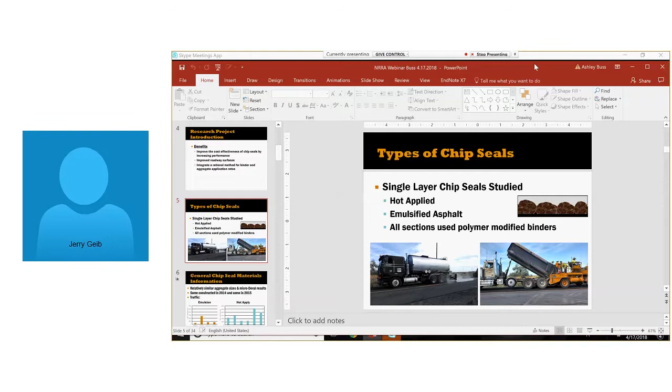Did you click on the present desktop, or did you present the PowerPoint in the Skype meeting? Because PowerPoint in Skype is really slow. I did the desktop. So you may need to minimize your screen to see your slides. Oh, are you seeing the desktop? Okay, now I see. It still might be a little slow because you've pulled the PowerPoint into the Skype meeting, which tends to be very slow. But try going to the slide. Oh, that worked. This works? Okay, perfect. So yeah, let me know, chime in if there's any other technical issues.

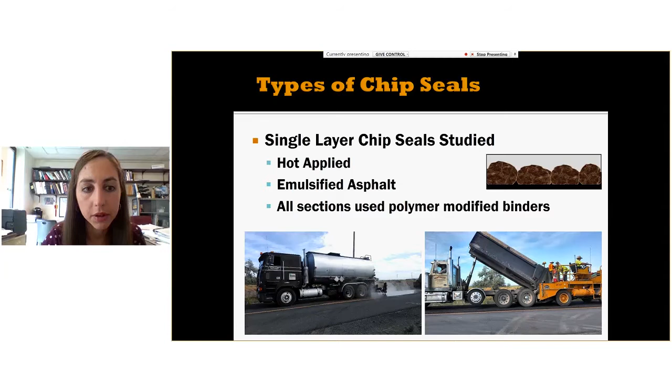Hopefully it'll advance now. But with the types of seals, we have the hot applied and the emulsified asphalts, single layer seals. Can you see my mouse? Yes, we can. Okay. So we have the single layer chip seals, and then all sections use the polymer modified asphalt binders. And so these are just a couple of the pictures from the chip seal construction process.

So for the general chip seal material information, my background's really in materials, and so we wanted to collect a whole bunch of information about the materials that we were using. But when we got all the materials here and started analyzing them, it's kind of interesting. We had relatively similar aggregate sizes, with the exception of Unit A down here. So I'll talk a little bit more about each of the sections, but relatively similar aggregate sizes. We had really similar micro-Deval results, so our anticipated aggregate polishing was about the same.

We had some seals constructed in 2014 and some in 2015, and I'll talk a lot more about the 2014 sections. And this is kind of the traffic profile in the graphs down here. We have the average daily traffic on the y-axis, and each of the units, and the units down here in the yellow, these were the emulsion, and those tended to be placed on lower volume roads. And we have the hot applied over here, and we had a pretty good range of different traffic volumes that those were placed on.

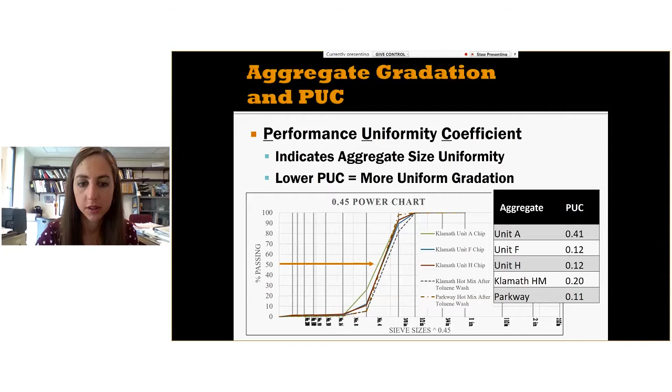So how are those? Sorry, I think we're one slide behind. Did that help? Didn't move. What should the title be? Chip seal performance. Yeah, we don't see that. Can we try? What'd you do last time? Minimize? Or did you kick up your PowerPoint? Share screen. And here's the presentation. No? We're still seeing this same slide. Can you minimize the Skype window and see if we can see the PowerPoint behind it? Okay, that's minimized. Did that do anything? Nope, we're still looking at the same screen. I'm not sure what's going on. I just have it in presentation mode and I'm advancing the slide. Maybe it's moving slow because the video is going. It shouldn't. Don't use the presentation mode, just use the PowerPoint.

So you're in share screen right now, and you've minimized the Skype part. Yes. Okay, we're not seeing that for some reason. This is a new one for us. Try not to use the PowerPoint presentation mode, just open up the PowerPoint. That's what she says she's got on her screen, but we're not seeing that. I guess try turning off your video. Okay, I'll switch to audio only. Yeah, that didn't work. Are you getting video or not anymore? No, we're not seeing video, but we're still looking at that same slide. Yeah, I've minimized it. Do you see that button at the top that says Stop Presenting? Yes. Maybe you should click on that. There we go. Okay, now we're back in the Skype window.

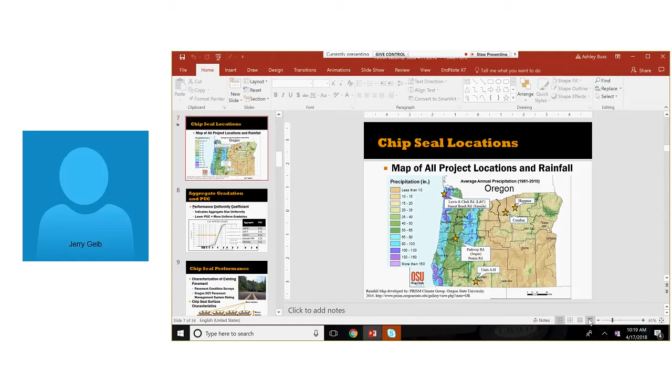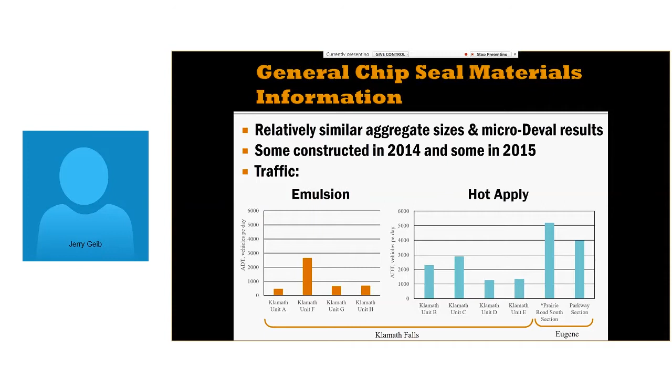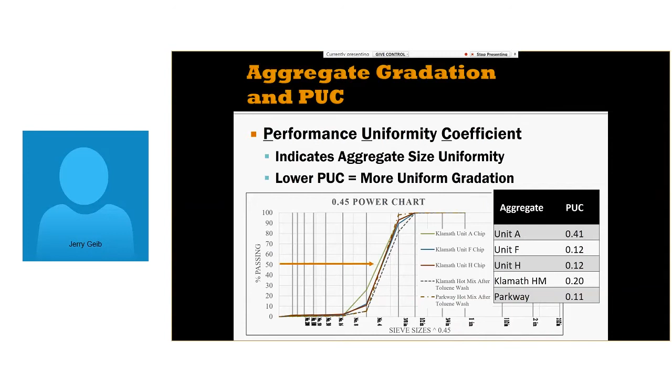Okay. And then try it again. I'll try share screen. Yeah, try share screen, minimize, and then open up your PowerPoint. Are you seeing it? It's coming. There we go. That looks better. Okay, that works. You can probably turn your video on again. Right now we're looking at general chip seal materials information. Did you see this slide yet? Yes. Okay, then I'll advance. So now we have all the chip seal locations, and this is new, right? Yep, saw that before. Okay. One more. All right. Now you can turn your video back on. Okay, I'll try. Well, I've got to exit out of the... Never mind then. Yep, we'll just keep going.

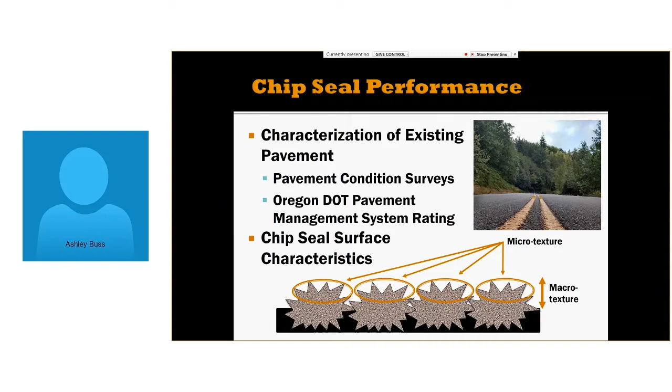Okay, so with the chip seal performance, we were characterizing the existing pavement condition. And so I wanted to talk about the microtexture and the macrotexture. So microtexture is really going to be a function of your aggregate characteristic, that surface texture of the aggregate itself, whereas macrotexture is going to be more of a characteristic of the number of aggregates that you have and the uniformity of their size and how embedded they are into the asphalt. So that's really an important characteristic of a chip seal because you can tell a lot of things by it. So macrotexture is really the key thing that we were able to take a look at here.

So it's determined by the size, shape, and the relative spacing of the aggregate particles. And to measure the macrotexture, we use the mean texture depth, and New Zealand has a very nice specification that's quick and easy to do. It's very inexpensive, and it's called the sand circle test. It's very similar to the ASTM sand patch test, except in the ASTM you're using glass beads, whereas in the New Zealand method you're using a very tight gradation of sand, and that ends up being a lot cheaper, and you can just leave the material on the roadway. You don't have to try and sweep it back up.

So in general, the higher micro and macro texture, there's kind of an interplay there, the better the skid resistance. And there are some really great reports that have been done about measuring the trends between micro and macro texture and having that relate to skid resistance.

We didn't get into that too much in this study because on the dynamic friction tests or the microtexture measurements, they were really seasonally affected. And so we think that there needs to be a better way to standardize those results, and they're pretty sensitive to seasonal variations. So we didn't get a lot of really great consistent data with the microtexture results, whereas with the macrotexture, we got pretty consistent data over time that was consistent across the sections, and then it matched up pretty well with other national level research that's been done.

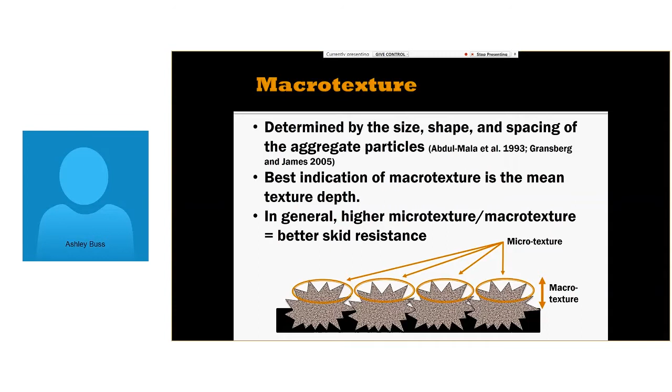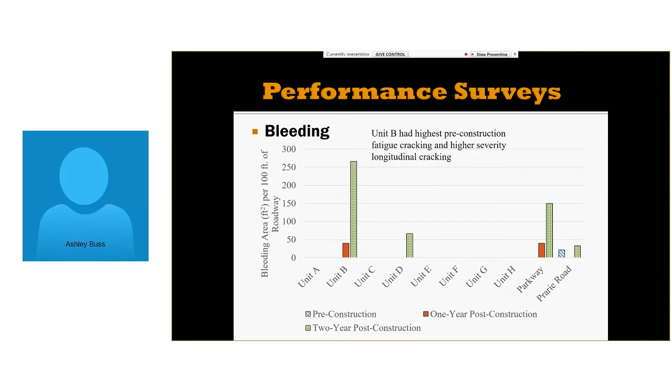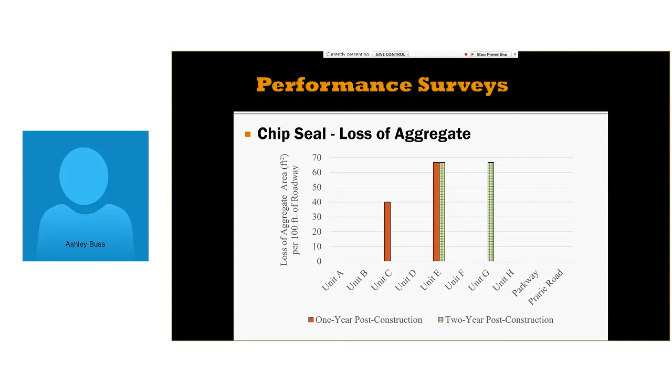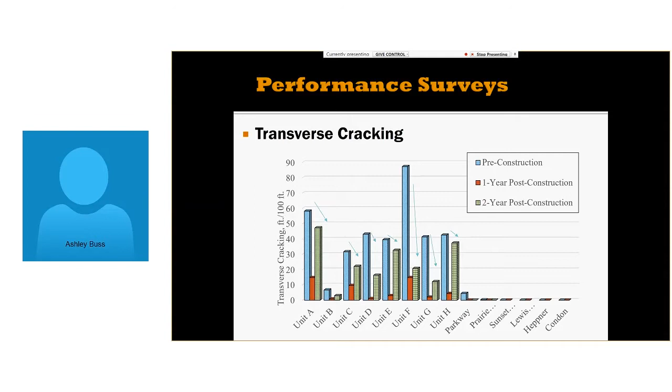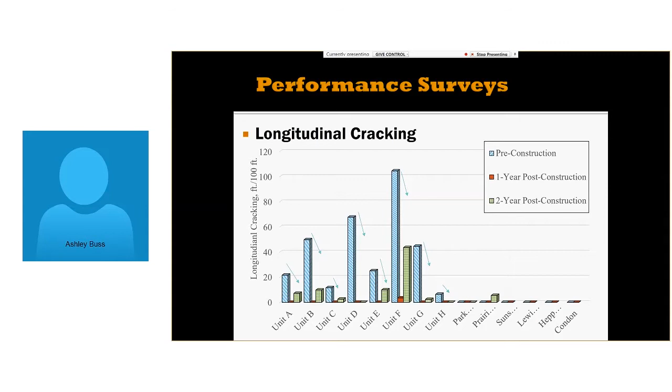And then I also wanted to talk about over here on the right side of the graph, where we had no cracking in a road, we didn't ever see additional cracking. So I thought that was kind of an interesting contribution of the study, looking at these sections sort of crack by crack, looking at the severities, and then seeing what's returning out there. And this is really about the type of binder that you're using. So is the binder going to be able to bridge those cracks? Are the aggregates going to stick there and have those cracks sealed up for some years after the seal is actually placed?

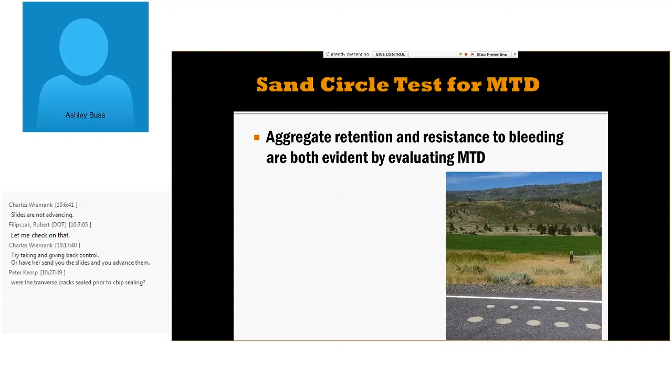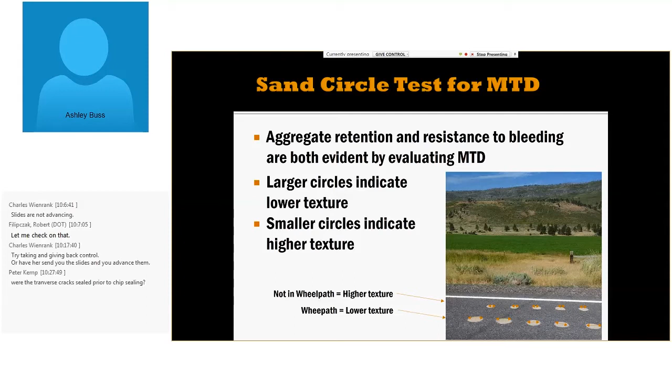So we ran the sand circle test to look at the macrotexture trends. The aggregate retention and resistance to bleeding are both evaluated by the macrotexture. The larger circles indicate lower texture. So the larger circles here, those are in the wheel path. And the smaller circles here, they're off to the edge. So that would be not in the wheel path, and you get smaller circles, so you have higher texture.

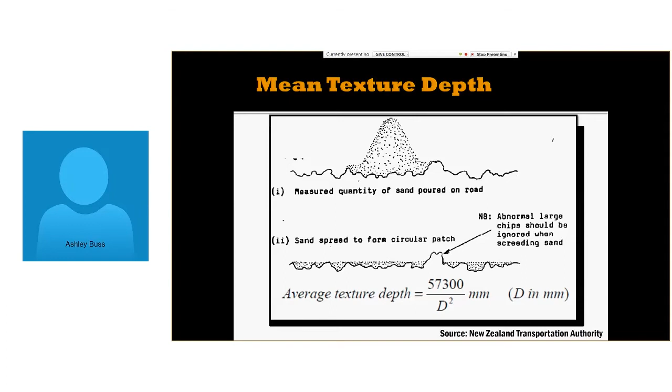And this is kind of just a diagram from the New Zealand specification of how mean texture depth is measured, and the equations that you can use to determine the average texture depth. So taking a look at what happened over time, start here with the pre-construction condition, pretty low texture. Right after the chip seal was placed, you have a high amount of texture, and then a reduction over time.

And we wanted to take a look at the performance specification that New Zealand's actually using. And so what they do is at 1 year, so we're focused in right here at that 1 year mark, they go in and they have an equation that uses the chip seal design life, so how long they expect this chip seal to last based on the amount of texture there, and they can also use that in programming new chip seals into their budget.

And so they come out at 1 year and compare the measured value versus the requirement. And you're able to tell here that we well exceeded the requirement. And this was Unit A, this was an emulsion, used a CRS-2P, and we had a 0.48 gallons per square yard.

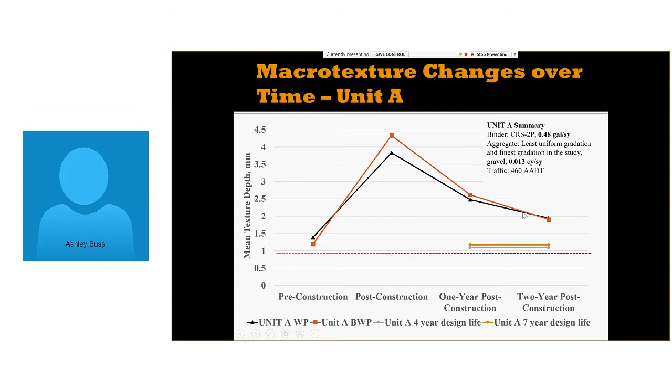And then this is Unit B and C. These had some rougher pre-construction pavement conditions, so some pavement deficiencies there to begin with. The mean texture depth was wider range to begin with, and after the chip seal, it looked pretty good. After 1 year, it looked pretty good, and then after 2 years, it got a bit lower, but it still would have passed that 1 year performance specification.

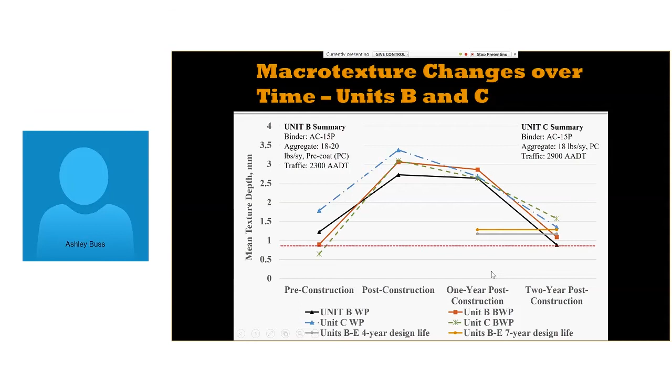And this is just another way to look at the data. So you have the mean texture depth, and these are box plots of the statistical data that was taken in the pre-construction texture condition. After construction, we have between the wheel path and in the wheel path, so you have a little bit of variability there. After 1 year construction, things kind of even out, and you have this deterioration curve that you can see happening in the sections.

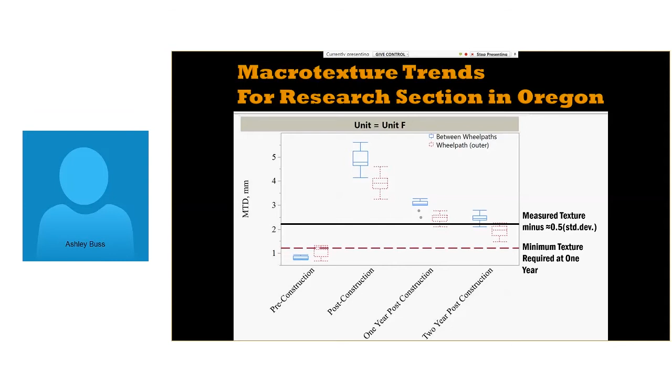Now we took that and compared it to the measured texture minus a statistical variance. So we want to make sure that we're statistically above the measured texture, and then compared that to the minimum texture requirement that New Zealand uses. So this is where we're getting into the idea of, wow, we think a performance specification might work pretty well for Oregon. And Doug had done a lot of work in this area.

This was published in 2010 in an Oklahoma study that Doug had been working on, where they studied the mean texture depth over some period of time, and they were taking the measurements in very tight increments. We were just doing yearly measurements, whereas Doug was out there monthly taking texture measurements for the Oklahoma study quite a number of years ago.

And so I was curious how our Oregon results would compare with the model that Doug developed in his Oklahoma research. And interestingly, here's that at construction, 12 months after construction, these dots are just averages of the mean texture depth of what we were getting. And our aggregates lined up, it was all pretty similar. And we follow this curve pretty closely. So what this means is that this deterioration model, you can use it in other places.

And what's really important are these trigger values here of, you don't want the chip seal to fall below a certain texture depth. So as that texture is deteriorating, you can use trigger values to determine, okay, once I put a chip seal in the program, how long does it take for me to actually, from where I program a chip seal, get it constructed? And you can use this deterioration model to back out and program your chip seal budget accordingly.

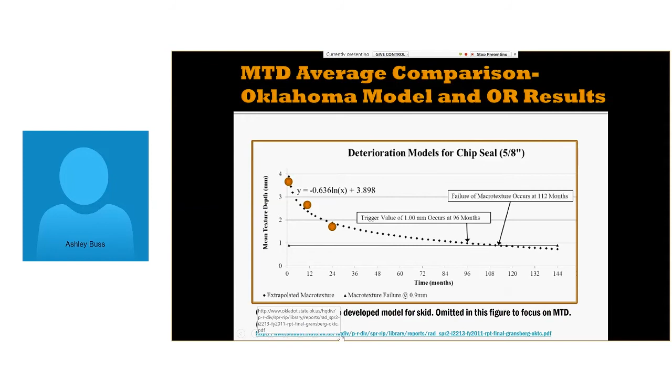So I don't want to spend too much time on preservation programs, but I think as we took these results of what we were finding in the chip seals, as we move forward to change specifications, we take a look at what Oregon has compared to the best practice recommendations that Federal Highway provides.

So the first one is adequate dedicated funds, and with that, Oregon kind of has an interesting cycle where they have an on year and an off year. So hopefully in the future they'll be able to even out the work a little bit more and have more sustained funding in the chip seal arena, and not have 1 year where you do a whole bunch and then the next year where there's hardly any.

And then also effective marketing of preventative maintenance, and I think that's just starting to communicate the results, the good performance that we're seeing in the phase 1 research, support from management, legislative support, training and buy-in of workers. So I mentioned there had been some folks retiring and some new inspectors in ODOT who hadn't had as much experience with chip seal. So bringing in some of that, the design and how that happens is important.

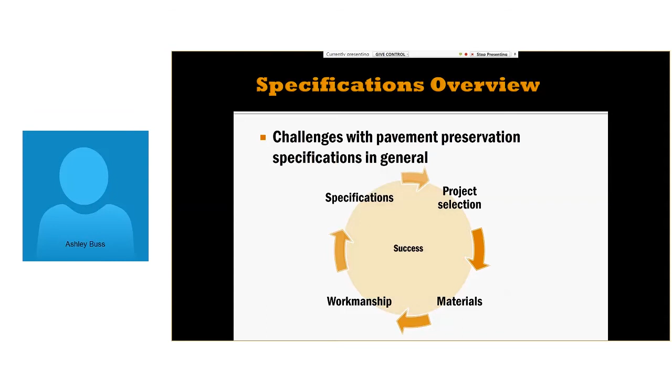And then with a performance spec, the big thing that Oregon wanted to do was get out of the business of setting the application rates. And so we're kind of taking a method spec, reworking it to have it be a performance specification. So that means we need to have different risk profiles, and that should ultimately change based on the pavement condition. So the worse the pavement condition, the agency needs to be taking on more risk, and the better the pavement condition, then the risk can be shifted more to the contractor. And then there's always that in between too, where you've got some shared risk profiles also.

Some of the specifications that played a huge role in the research is the New Zealand P17 chip seal performance specification. If you haven't looked through it, it's really an interesting program and an interesting way to do a performance specification. There's design guidance. They have a really great manual all about chip sealing and the history of chip sealing in New Zealand.

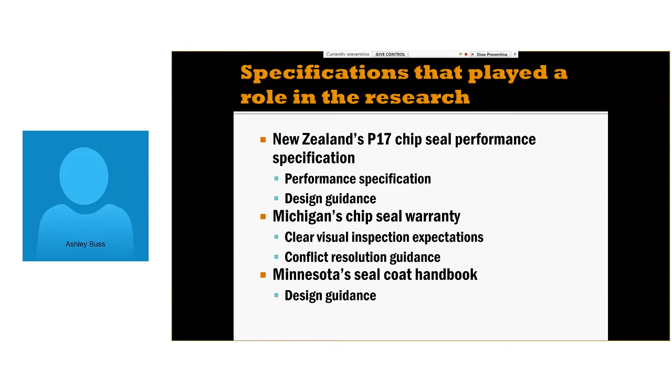So some of the major specification changes that we're moving forward with is removing the application rates. And this is really a culture change between taking a method spec and then using a performance specification with the macrotexture requirement. So in the new specification, the contractor would provide the material test, and then they would design the rates of the chips and the binder.

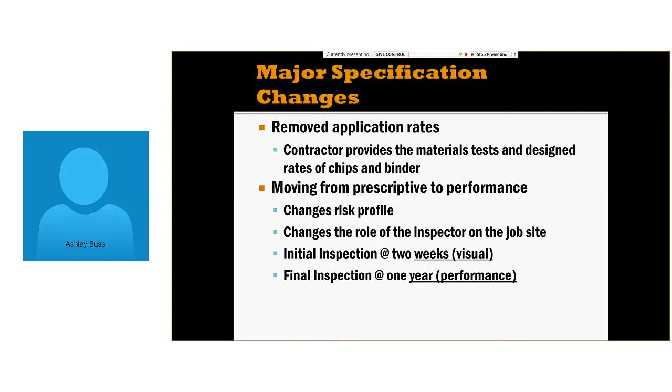And moving this from a prescriptive to a performance specification, that's going to change the risk profile. It'll change the role of the Oregon DOT inspector on the job site, and we'll have an initial inspection at 2 weeks where there's a visual inspection, and then a final inspection at 1 year. So in the performance evaluation, there's a visual inspection that takes place at 2 weeks and 1 year. Then at 1 year, the macrotexture trend over time is looked at, and then also the variability in the macrotexture tests will also matter.

So major specification changes would be a 1 year maintenance period for the contractor, and it would be anticipated that that's going to be built into the price of the bid. The pay schedule is going to change, and that's one thing I think will really influence how easily the specification will be implemented, the details on the pay schedule.

Retainage really isn't an option because the contractors have to pay their material suppliers, and there's a little bit of profit margin, but there's not a huge profit margin that retainage can be absorbed. So the bonds seem to be the best way forward, and it seems that's how most states with warranty bonds are able to do the bonds on the chip seal.

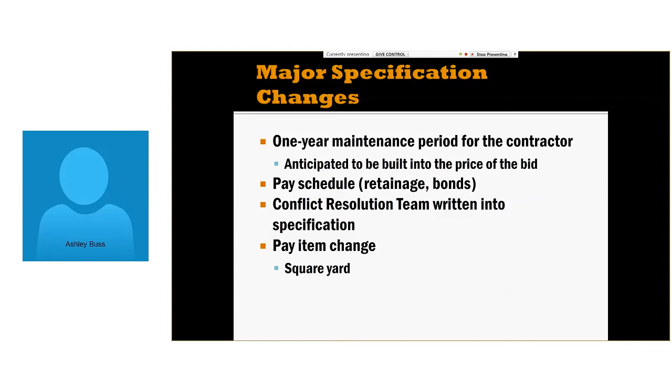So I mentioned the role of the inspector is going to change. With the old specification, the inspector was actually setting the application rates. So they had an active, more directive role in the construction process. In the new specification, it would be more of an active observer. They take the observations, times, temperatures, actual rates that are applied, and use these notes at the 2-week initial inspection, and then again at the final inspection.

Another thing is the inspector, we want them to share any concern with the contractors at that time while the contractor is there. And if there's any problems with the chip seal, we want repairs to be made as soon as possible, because it's easiest to make the chip seal repairs while the contractor's there.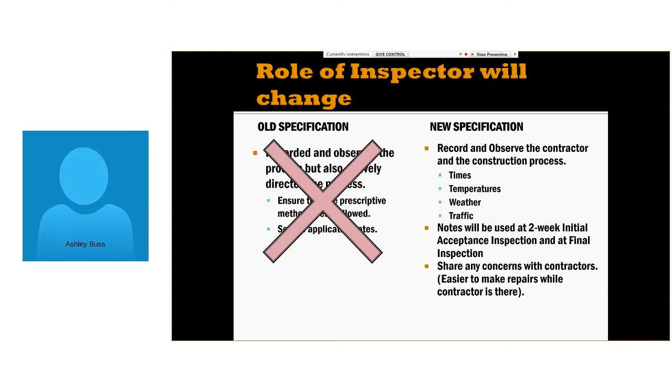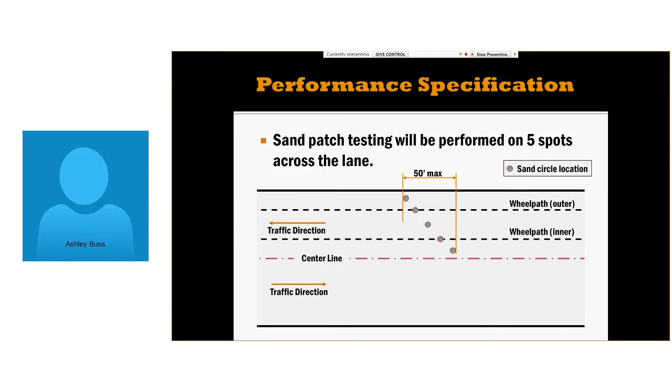And all of the sections that we looked at, they passed. So it'd have to be a pretty catastrophic failure of a chip seal to not pass the specification. But we think it's a good way to see, once we're out there 12 months after construction, that we have a good seal and that it's going to last for some time. The sand patch test would be performed on 5 different spots across the lane, and then the average would be taken as well as the standard deviation, and that macrotexture would be compared to these numbers here.

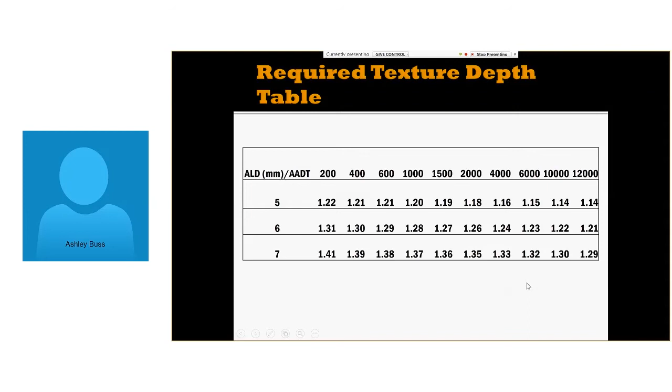So this is just a flow chart that we developed. I would call it a work in progress, but we have the chip seal process, the bidding process, kind of the project planning stage. And then when we move over here, we have the construction. Then there's the initial acceptance, the maintenance period, and then finally the final acceptance. We've been working through how to implement the performance specification so that it's done in a way that we get everybody on board.

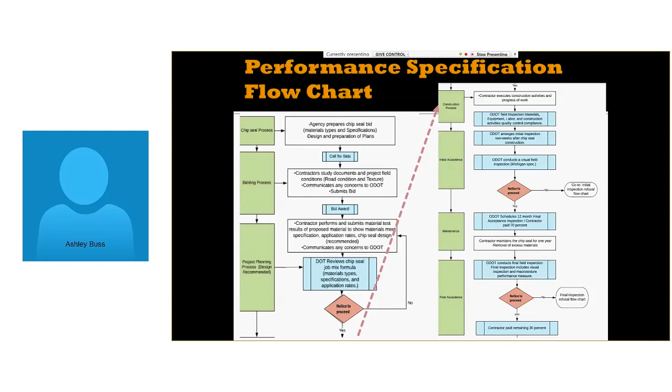And what we really wanted to do with the performance specification is, when we do have a chip seal that fails catastrophically, is there a way to have something written into the specification where ODOT can recoup some of that loss? Right now with the method specification, there's really not a good way to do that. So that spurred some of the change, and it's not that they have a lot of chip seals failing. They have a lot of really great performing chip seals, but the ones that do fail seem to be the ones that everybody remembers.

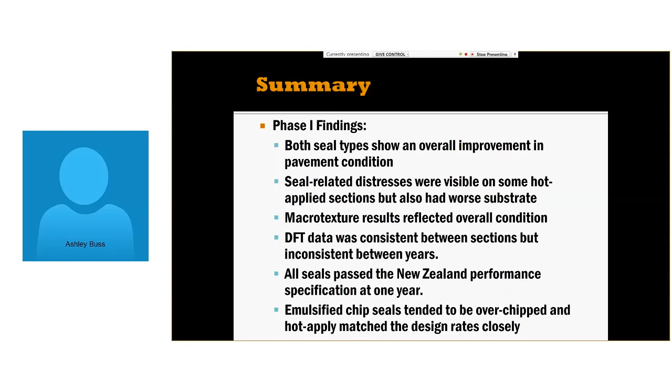So phase 2, with the specification changes and implementing the phase 1 findings, it's really been an open dialogue about changing the specifications. We've had a lot of meetings, and bringing more people to the table and changing those specs has worked very well. It's a large shift in culture, and so that's taking time.

The payment retention isn't really going to be practical for contractors. And so because of that, we're continuing to work with performance specification and implementation. We're looking at options with bonds if there's a way to do that, and work with the higher ups and other offices within ODOT to figure out what we can do from a financial aspect to get the performance aspect of this written into the specification.

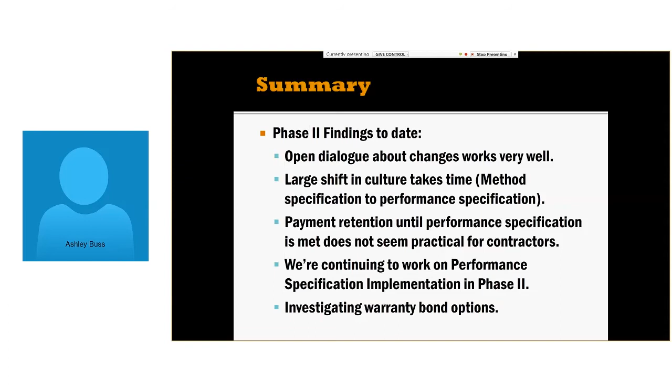Hey, Ashley, this is Bob. We've got one question online about, I'm not technical, I'm going to have to try this again. Were the transverse cracks sealed prior to construction? I think that's what it says. Let me see if I can pull it up here. Oh, were the transverse cracks sealed prior to chip sealing?

I don't think they were, because the teams that were out there, the boots on the ground folks taking those measurements, didn't mention that they were. I think one section in Eastern Oregon in 2015 had some sealed cracking, so that they didn't register as higher severity. But in Klamath Falls, it wasn't mentioned that those were sealed, so I don't think those were sealed as much for the Klamath Falls section, which makes up a bulk of the research.